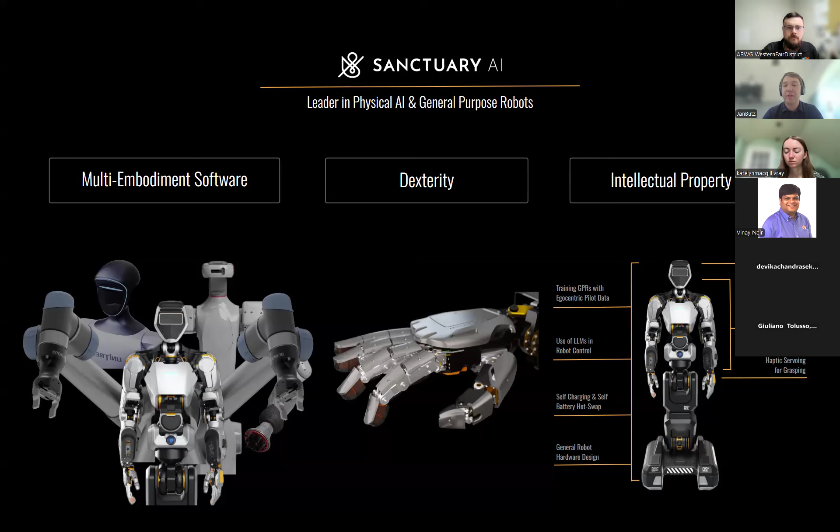And if you take a look at research done by an external firm on the robotic startup space right now, we own more patents than all our competitors combined.

What means general purpose labor or general purpose robots? Well, that means a robot that can do multiple different tasks and is not specialized on a specific task.

So here, for example, on the top left, you could see the robot doing a sorting task that's fully autonomous. On the top right, it's a precise insertion task, a typical automotive task where you pick something and place it into a welding fixture. The bottom left shows a task where the robot is picking something and then operating measurement equipment for quality assurance.

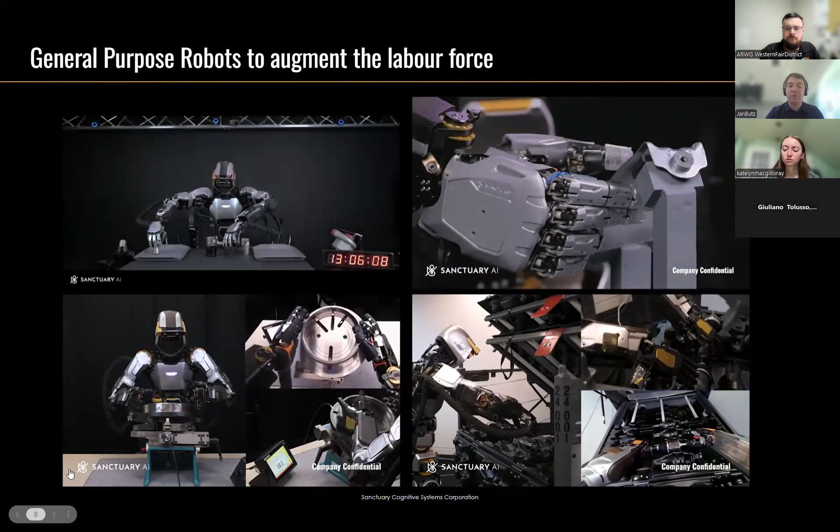And on the bottom right, it's another automotive task where you handle drive shafts and sequence them for the production line. Now, these are our main areas we're working on right now. It's the automotive industry where there's a lot of pull for these kinds of robots, but we are also expanding into other industries.

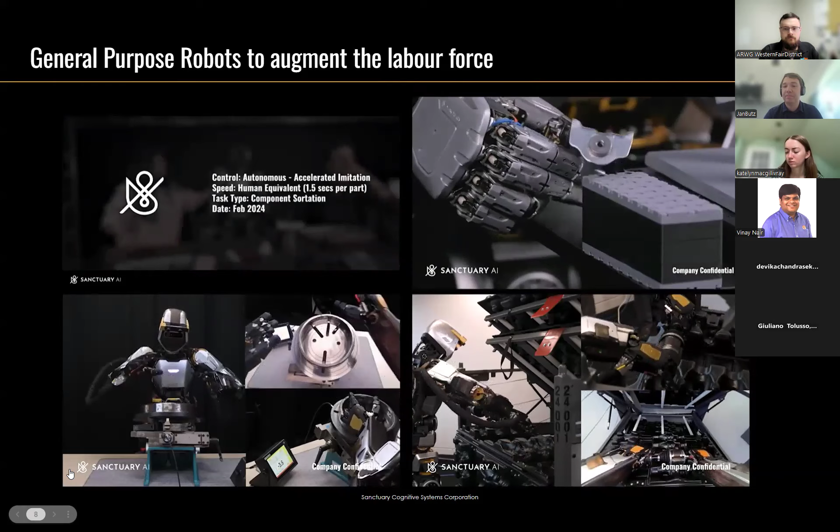I already mentioned we are working on multi-embodiments, and that is one of the reasons we have our ML pipeline, our machine learning pipeline, that is completely hardware agnostic. Now we can run it with off-the-shelf cobots that are out there. We can run it with Phoenix, our humanoid robot, or we can also run it with other embodiments.

The benefit of it is that we can use less data for training our foundation models, and we can have early commercial realization with hardware that is already reliable, already vetted by multiple industries, and we are not purely relying on the hardware we are developing in-house.

How can that look? So here you could see on the left side a cobot doing one task. It's a precise insertion task where a gear needs to be placed on a gear shaft. And on the right side, you can see Phoenix, our humanoid system, doing the same task.

On the left side, the engineer messing with the system is for the training process, so that the robot can learn how to deal with variances. The robot will push to the side, the position of the gear shaft is being moved around. Thereby the robot knows how to handle these different variances that he can see in his real environment when autonomously doing the task.

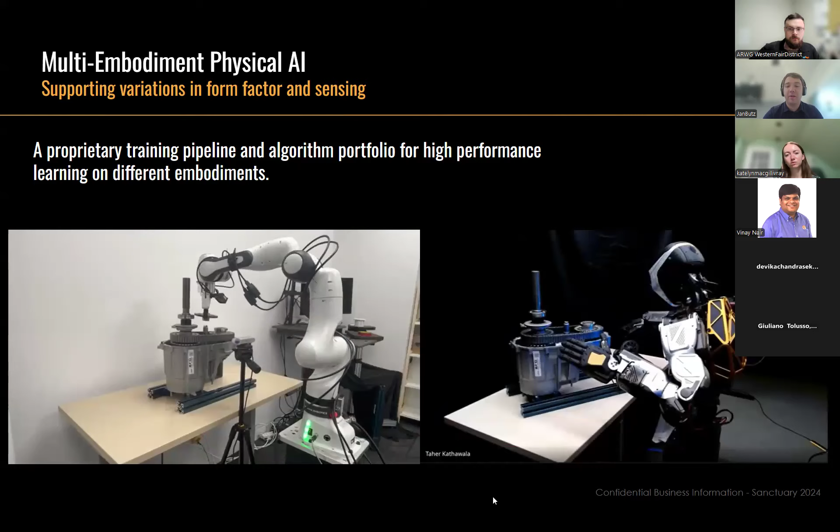Overall, the benefits of this approach with our multi-embodiment is the less data that we would need. So what you can see here, the task on the right was trained in less than 2 hours. And for fully trained, we were able to achieve more than 99% success rates.

And this is a huge success for the autonomous learning of systems, because thereby you don't need hundreds of hours of training data to fully autonomously perform such a task. The robot with this reinforcement learning approach can learn by itself how to do this task, and there's only a supervisor necessary to see if the robot is really doing the task successfully.

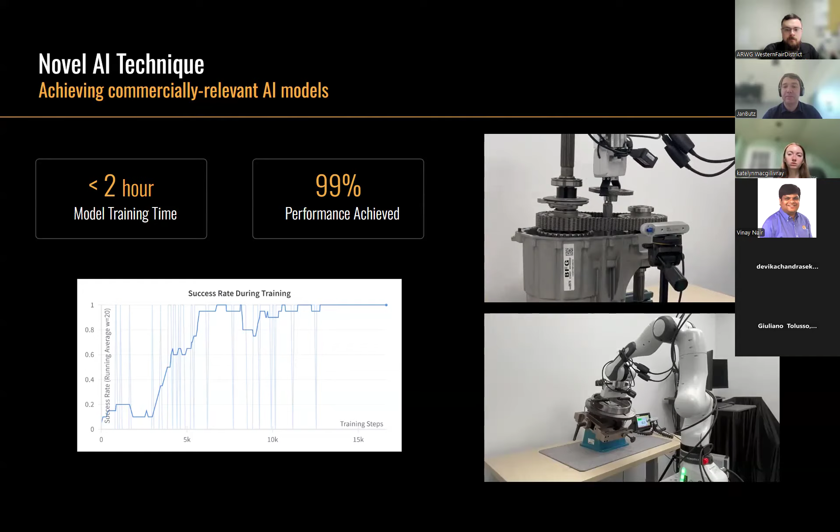As already mentioned, the first part on how we're training our robots is usually done with teleoperation. That can be seen here on the left side. You could see a pilot that is wearing some gloves that he can feel what the robot is feeling. So it's a tactile feedback, and he can control the hands of the robot.

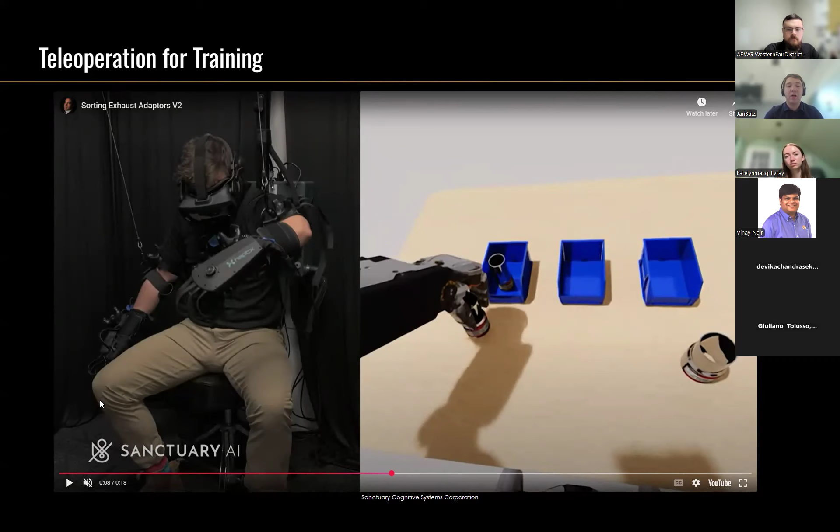He's also wearing motion tracking devices where the system can track how his arms, head and shoulders are moving, so that the robot can do these movements in the same way as the human is doing it. And the pilot is also wearing VR glasses so that he could see what the robot is seeing.

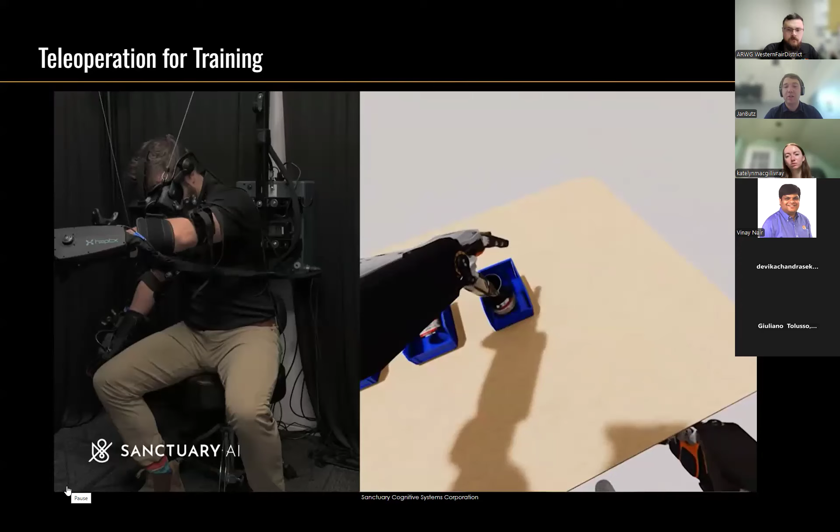Right now, what you could see on the right, it's not the real robot, it's the pilot doing that task in simulation. And then afterwards, he can also do it with the real hardware.

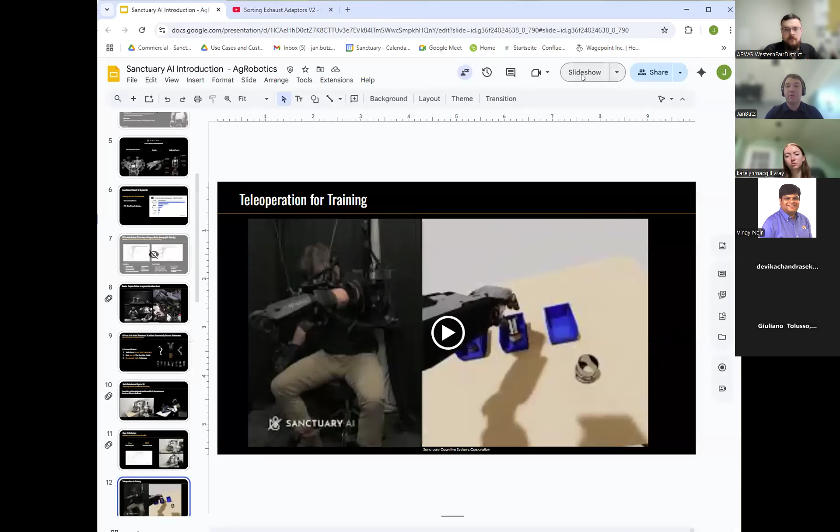And that's usually how we start training our system. So the pilot shows the robot how to do that task. And based on this first training data, some additional AI learning capabilities come into play, where the robot can further improve the capabilities he learned from the human showing him how to do that task.

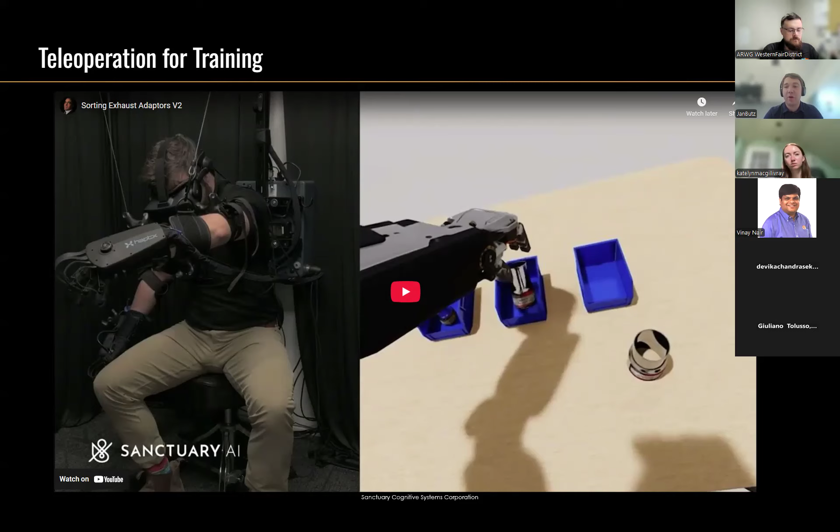Our second pillar was the dexterous hands. There we're working on hydraulic actuated hands. Why hydraulic actuated? It is the power density that we can achieve with it.

Most of our competitors are working on hands that are DC power operated, so electromechanical hands, where you can achieve right now around 100 watts per kilogram. With human hands, we're around 500. And with our hydraulic hands, we can achieve up to 2000 watts per kilogram in power for our grasps and movements of the fingers.

Our main part there is that we were able to miniaturize our valve system. So we are way faster, way smaller, and also more cost efficient than other off-the-shelf hydraulic valve systems out there.

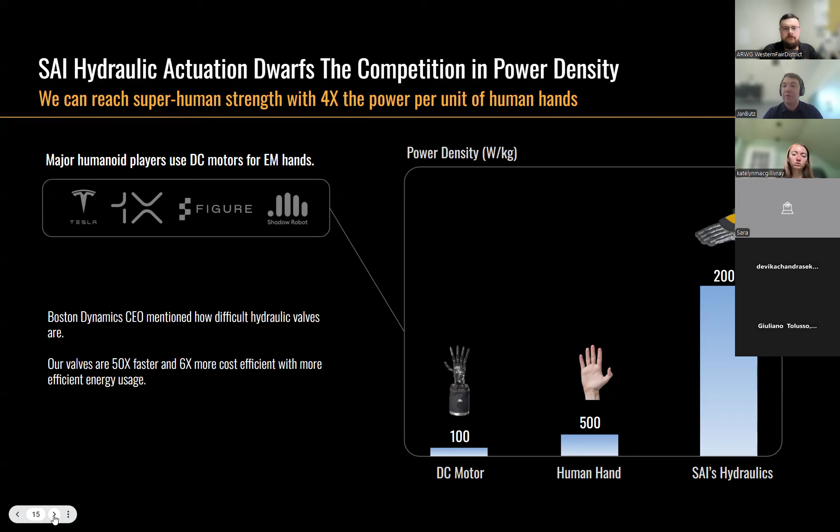Hydraulic is very often called a dangerous technology if it's around humans or if somebody's working around that system. We are working with, compared to other hydraulic systems, very low pressure. We're having around 800 PSI in our system. Already the bike brake is somewhere in that ballpark area, and most other systems are currently higher.

And with that hydraulic system, we can also ensure that we have impedance control, not just position control, so that the robot is also able to react to environments where it only touches something and doesn't see the environment.

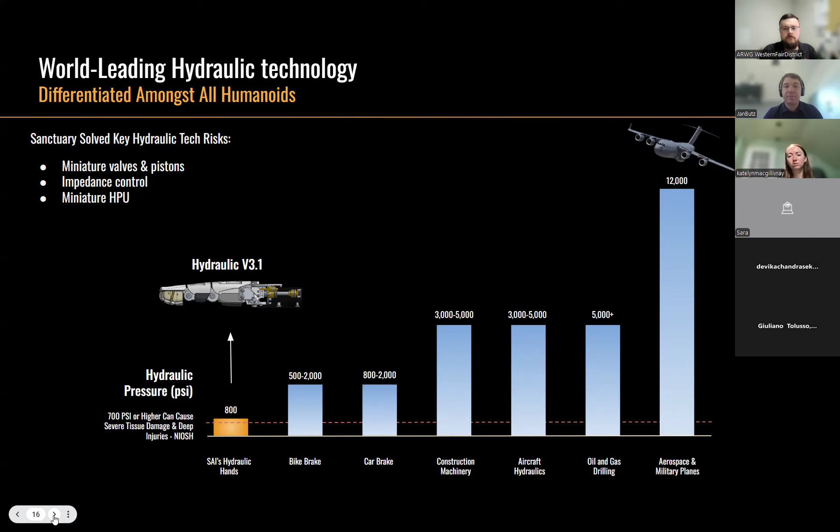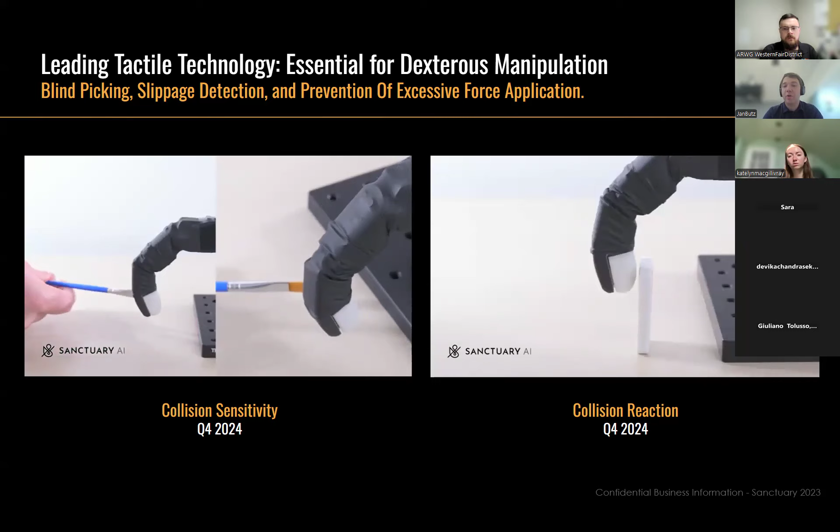And also for touching, we've developed in-house touch sensors, tactile sensors, where we can ensure that our system feels the world as we as humans are feeling the world. The robot should do human-like labor, and therefore we believe that the robot needs to feel the world like a human if it should interact with the world as a human.

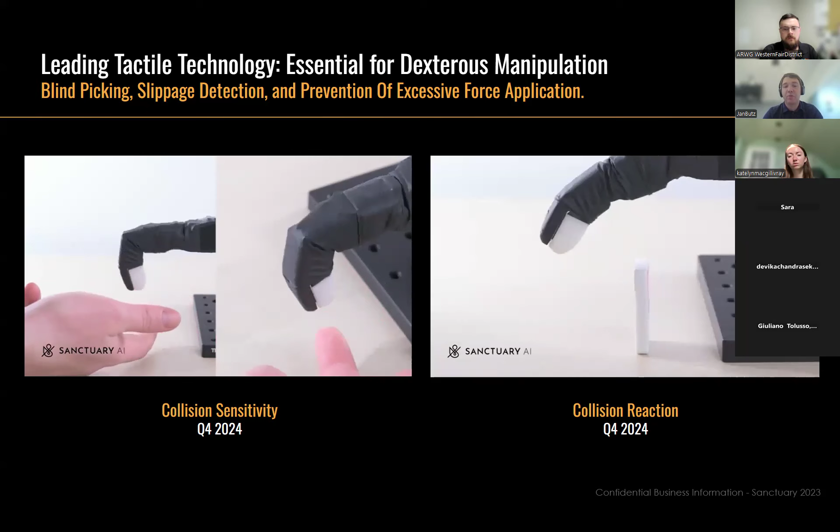On the left side, you can see how sensitive the fingertip we've developed is. Right now that finger is programmed so that it always moves away from the position where the human is touching it.

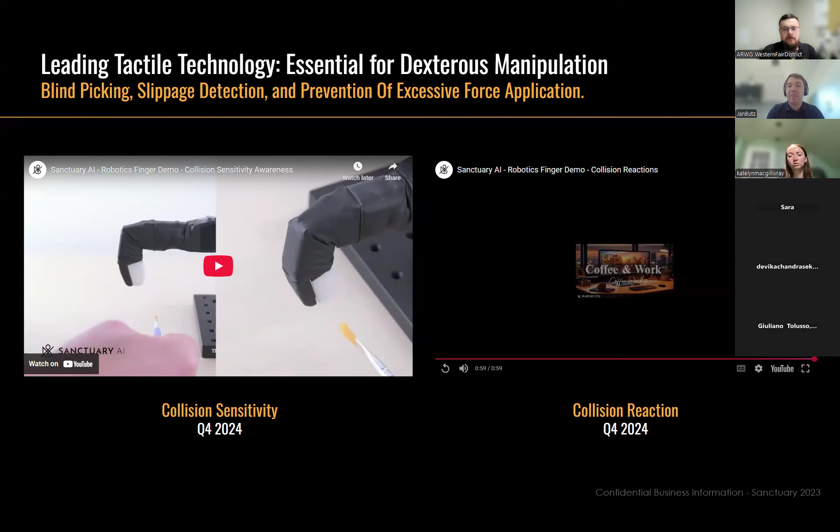On the right side, feel free to test it yourself if you have a domino brick at home. Without looking at it, just try to touch it without flipping it over - it's pretty difficult. That shows how sensitive our system really is.

We're talking about 2 millinewtons that we can already react to, but also high grasp pressure, so it's a pretty wide range.

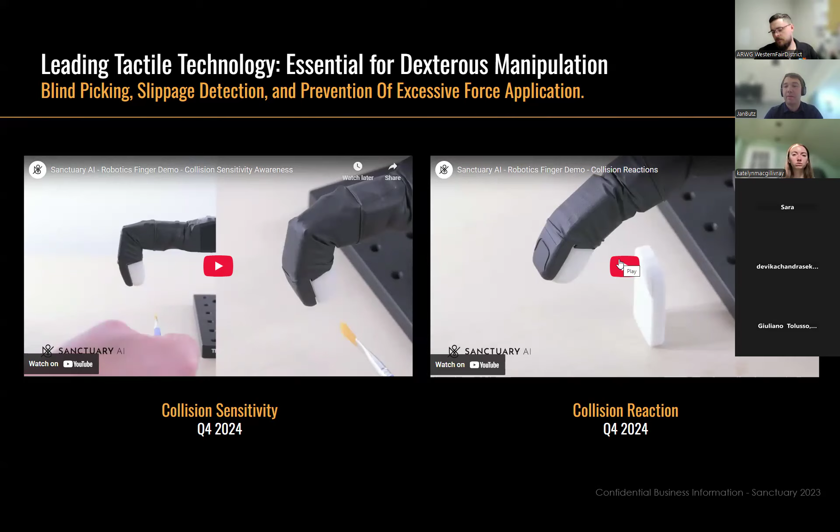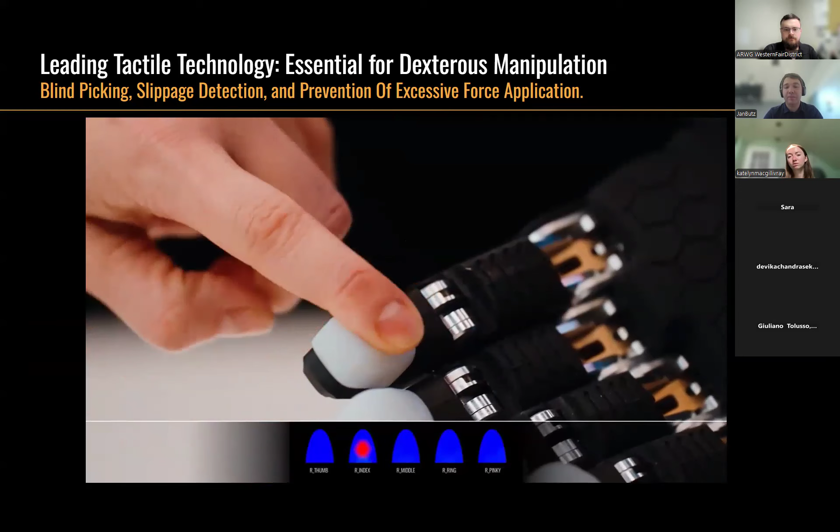A small overview of how these fingertips look on our robotic hand. Here on the left side you can see where the robot is feeling that it's been touched.

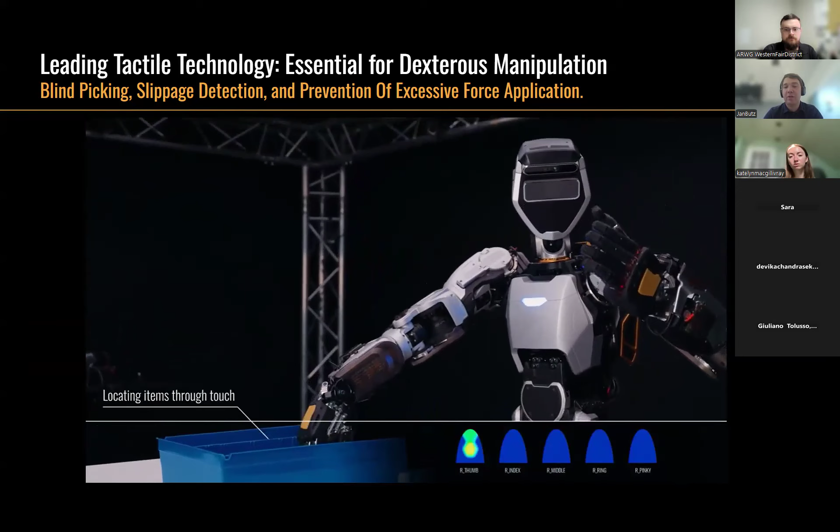And what we can do with it is, for example, blind picking. The robot right now is under teleoperation. The operator looks at his left hand, and the right hand is picking something out of a container where he's not looking - it's really just feeling it.

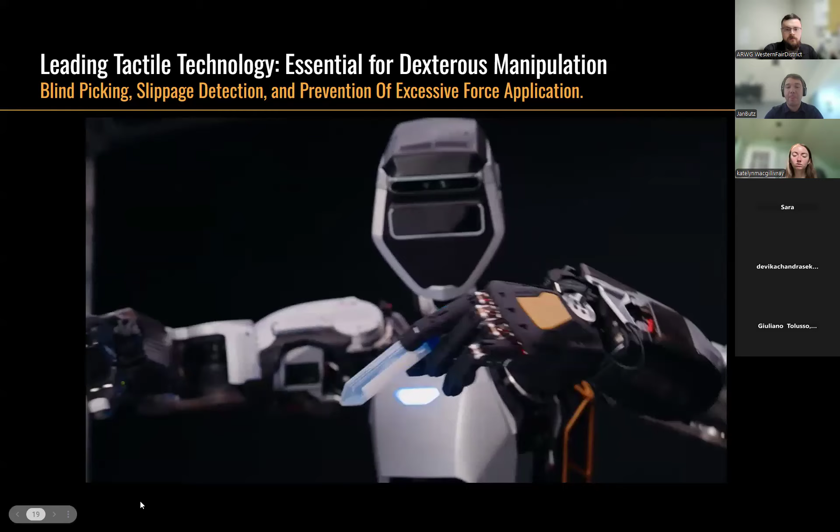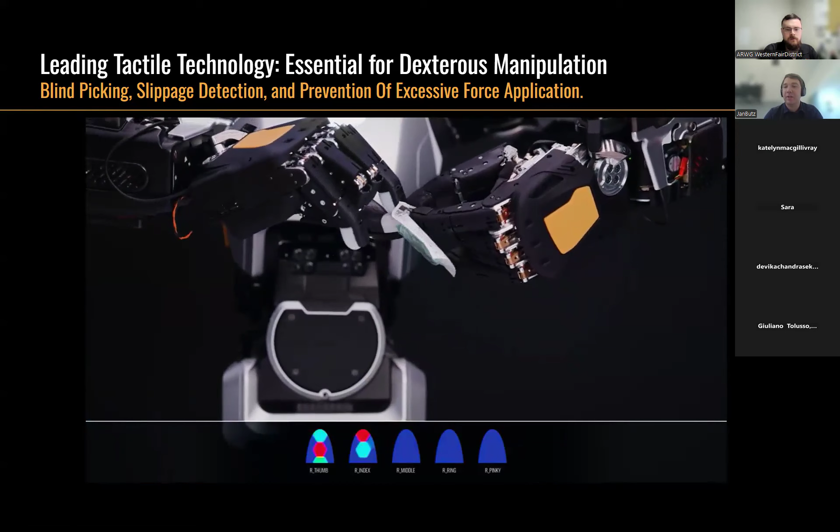Then the system can do precise placing, or as can be seen here, unpacking. That was an example we did with one customer for syringes. I think everybody knows how difficult it already is for us as humans to unpack these small plastic coverings.

Seeing this with a robot is really impressive, and shows what kind of tasks are possible to automate that are right now not able to be automated with classical automation.

The other part is how we are training our system with our reinforcement learning approach, which I already mentioned. On the left side, you can see a robot hand in simulation learning how to rotate a cylinder in its hand.

Then what we were able to do is zero-shot transfer learning from simulation to the real hardware. We trained the whole policy for rotating that cylinder in hand in simulation, and then transferred it to the real hardware.

A hand that we have in our lab was able to rotate the cylinder without any additional learning data - really only getting simulation data, putting it onto real hardware, and the system was able to rotate that cylinder.

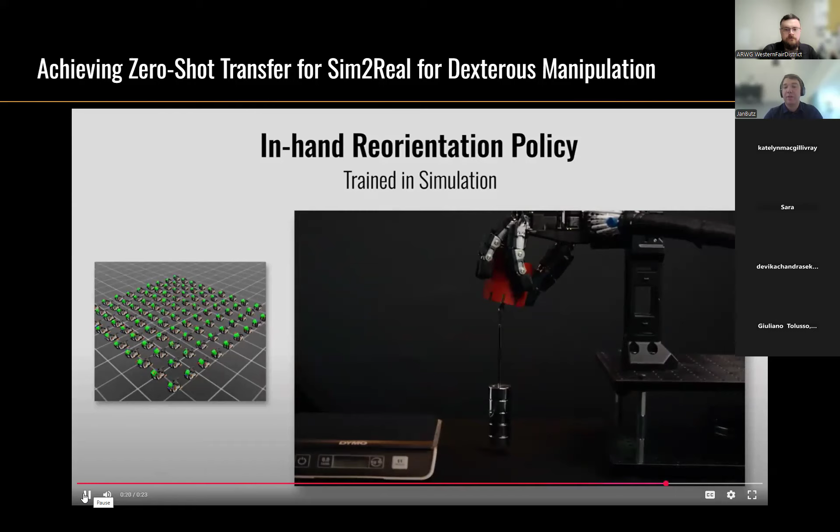And not just this - the most impressive part is that we were able to take that hand, hang it upside down, and even put 500 grams on it pulling toward the bottom, without that system ever having seen it in simulation. The hand was still able to rotate that object in its hand.

An overview of how we're currently working with our system. All the humanoid hardware right now that is out there, even if YouTube tries to make us believe it's already productionized, most of them, or nearly all of them, are prototypes. So right now we're working with different customers together on a way to industrialization.

Currently we're discovering different use cases with multiple customers. We're working on a proof of technology. Then in the next step, we're trying to replicate these tasks on our side, where we can automate it in our lab area with a proof of technology.

Then the next step we're working on with our customers is that we're doing a proof of concept. So we're taking our systems, if that's Phoenix our humanoid robot or other hardware configuration, to our customers and training there the use case and to show them in a 2 or 3 weeks deployment how that task can be fully automated.

Then afterwards, after that proof of concept at the customer side, we're working on a pilot. That's the first system that would be deployed in a customer task, doing fully autonomous labor. And then afterwards, it's a scale-up phase for that hardware and that software that's being trained in the pilot phase, scaling it up to many systems at the customer side.

Thanks, man. Yeah, great. Echoing that great presentation, and it's been fun watching Sanctuary evolve and you guys making more progress. I'm wondering, I don't know if you can answer this. What's the target price point, and what's the business model? Are you guys aiming to sell these as sort of capital assets, so someone can buy it and own it, or is it looking at like a subscription model?

So right now the pricing is still in development with the customers we're working on. We are aiming, especially in the manufacturing area, for around a 2-year return on investment with a 2-shift operation. But we are also aware that this price would drop further along the line with more and more systems coming up and operating. So that's currently the ballpark we're aiming for, because that's from the industry perspective a sweet spot for pricing.

And right now, also the pricing structures, there are multiple options. It's either robot as a service, or labor as a service. So the robot is doing that task and you're paying a subscription fee per month, per year, to have that system. Or it can be bought as the overall system. But that's something currently in development. It's most probably a subscription model where you have an implementation or training cost upfront, distributed across as many systems as you would need. So it's kind of a credit for the first system - you paid for the first system for the development, then get credit throughout multiple other systems. Then it's a subscription.